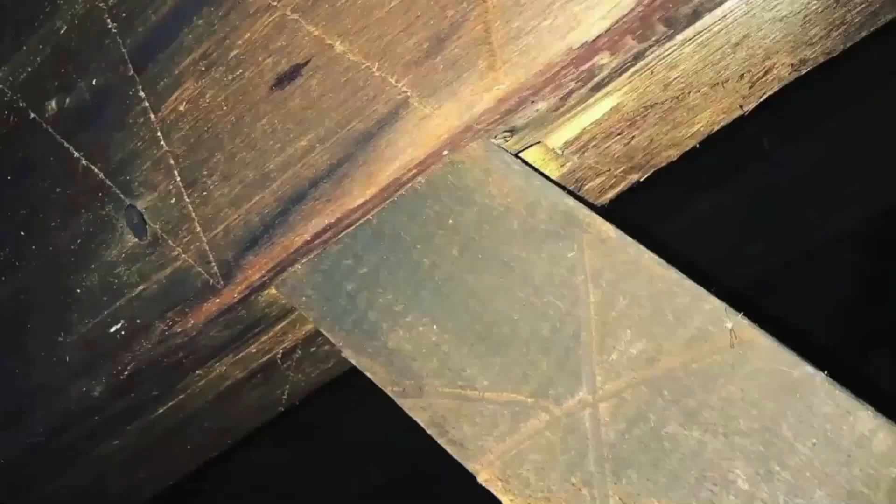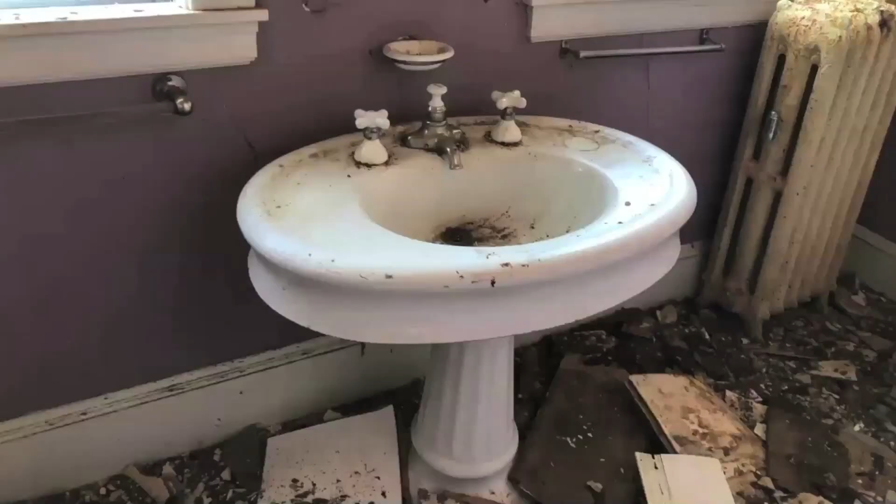Fixtures and appliances can be character-defining features in some instances. You know, this sink, the steam radiator, they can be character-defining. What does it say about the occupants? Why were they installed? Was this the new technology of the time? What does it tell us about the people that live there?

So what does that mean for us? It means when we're working on these projects, we have to find that compromise, that balancing act. And we also have to manage our expectations. And I think if you're a builder or an architect here, it's probably one of your biggest jobs when working with clients is managing expectations.

We have to accept that change needs to happen, but also understand that there are certain elements that have to be preserved to keep these buildings historic, so that we can look at it and see an 18th century Cape Cod style house, but that it's also comfortable and livable. As preservationists, we have to accept that there are new definitions of what comfortable living space is. And so, again, that's going to be part of the compromise.

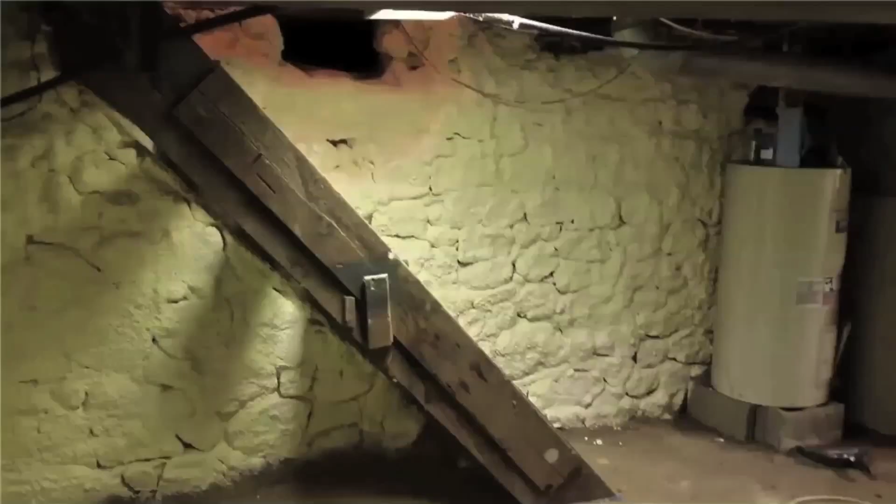We have to think about the materials that we use and how they will affect the historic materials. So what will this foam do to the porous materials underneath it? Is it reversible? And I think that's one of the main takeaways from today: we have to think of ourselves in this one period where there's people before us and there's people that will come after us. And what we do to these buildings, we have to hope that it can be reversible if need be.

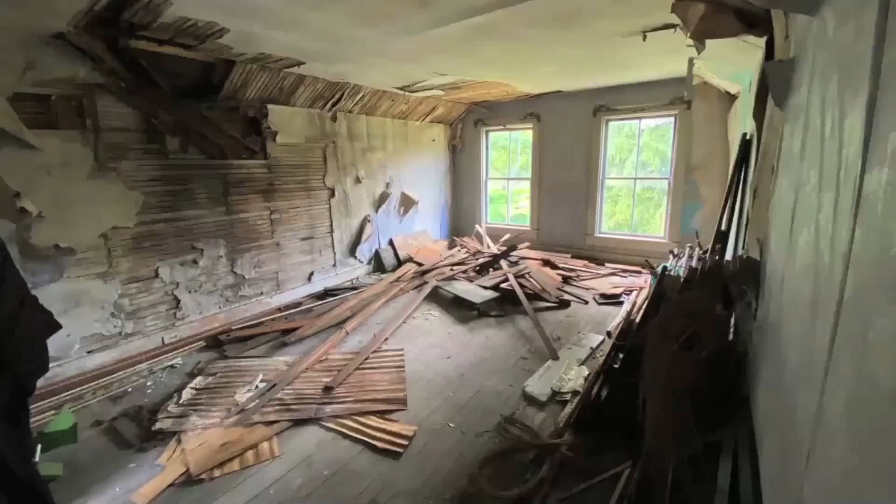We have to look at historic materials and new materials in terms of their serviceable life. How long will they last? What is their integrity now? So as a preservationist, yes, I want to save historic plaster, but I also have to accept that sometimes it's lost its historic integrity and it's not worth saving. And so the question becomes, what do we replace it with? Is it worth replacing it with new plaster? Or can we do blue board with a skim coat? Or can we just do it with drywall or some other type of interior finish?

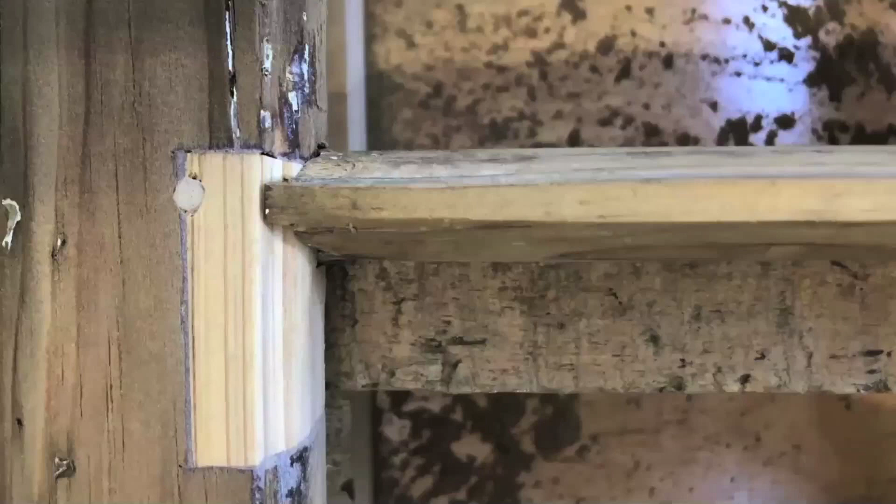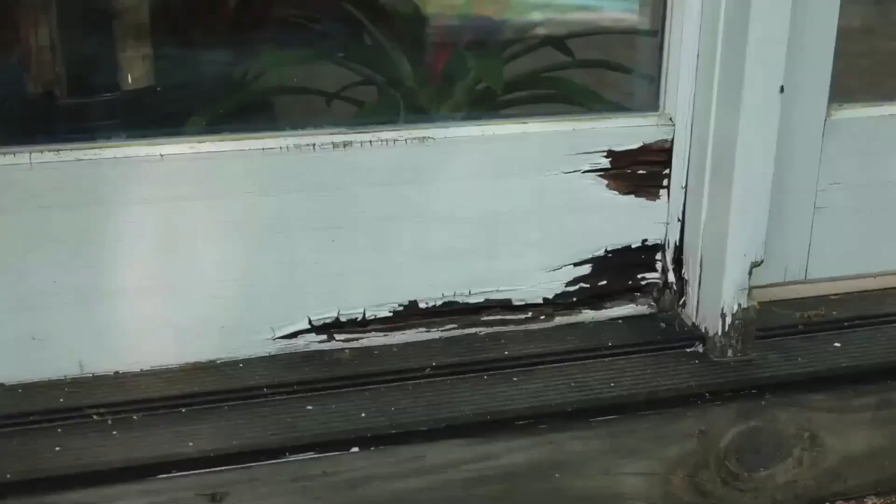Something that's near and dear to my heart is maintenance. We have to remember that buildings require maintenance. No matter what the vinyl or aluminum salesman says, buildings take ongoing care. We need to take care of them and maintain them. And that's not always a bad thing. Like these 1820s windows that I restored, they can last another 200 years if they're just well maintained with a new coat of paint. And I think that ultimately that's better for the environment if we keep things out of the landfill. And once we get on that replacement train, it's pretty hard to get off.

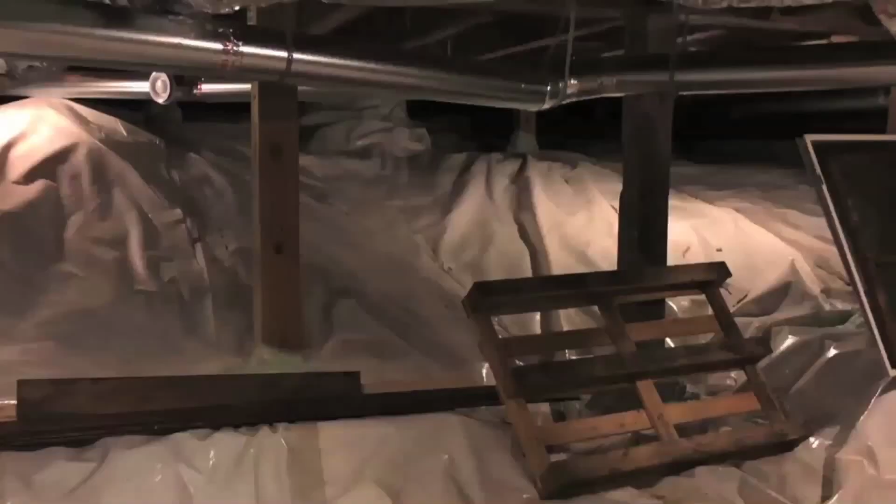So specifics, when we're thinking about insulation, again, we have to acknowledge that buildings need insulation. But so what do we actually use? Do we use an irreversible material with a high R value? Or can we use a reversible material like this cellulose with a slightly lower R value? Can we just manage the moisture and vapor and air barrier and then think about how else we're going to tackle a thermal barrier? Or maybe is it necessary?

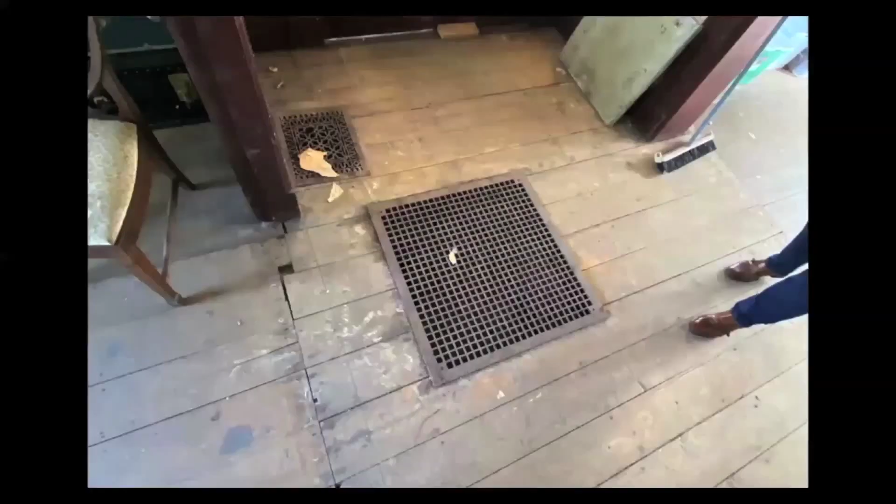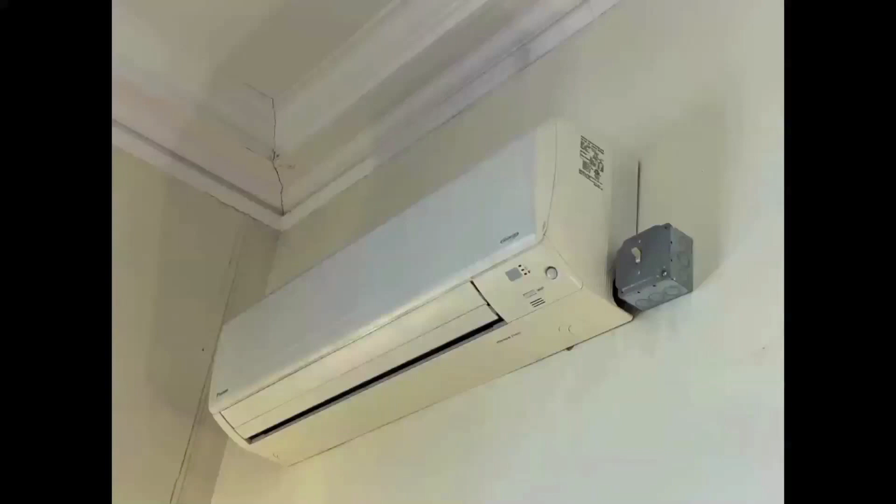Low-hanging fruit for me is replacing inefficient heating sources, like this gravity-fed system in Swanton. But then the question also becomes, what's the best option for a new efficient system? Like, does this heat pump detract from the crown molding and these high ceilings? Would a better option be a floor-mounted system? These are the questions that I think we want to ask. And I think that's kind of the biggest takeaway for me is that it needs to be a conversation, that it's not going to be a one-size-fits-all approach. It can't be.

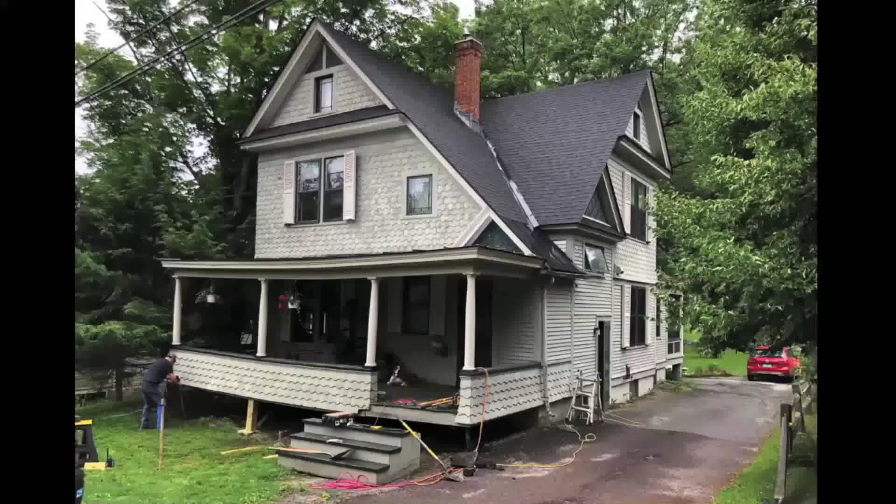So just to summarize, we have to remember that these buildings, not only are they homes, but they're cultural resources, like this workers' housing in Burlington. What does that tell us about that community? We have to think about the specific features of these buildings that are important and worth saving. And finally, we have to think about how we care for our buildings. Now, in the future, what will we be able to do? What will we be able to remove or replace?

And I hope that was a brief summary of what historic preservation is. But again, I'm looking forward to this conversation. It's something that's really important to me. So thank you.

Thank you. That was a really, really great introduction, Alex. Alex and I have been working on this building down in Pittsford. It's interesting because it's not in a historic district. It has a lot of meaning to its family, and it's a great example of how I think COVID has had one huge benefit: it has encouraged us all to slow down and understand the life and uniqueness of really every building, like every person. As we slow down, we can focus on being more inclusive rather than being exclusive in the traditional sense of a historic building. If it's historic, it's got to be nationally recognized.

So here is a historic building on the quiet edge of a very quiet town. And Alex is going to take us through the beginning of it. And we're looking at these steps of how do you make a plan for this building. This house actually has been in the same family almost since it was built. And they're not sure what to do with it. And so it's a very personal and private adventure that they're taking on as it switches generations. And it's going to ultimately be a personal decision for them of how they balance the building with the environment.

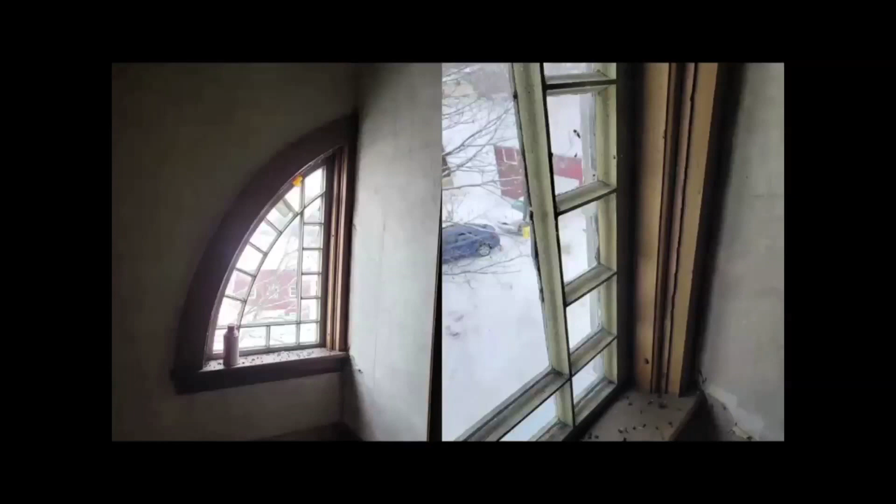Oh, so sorry, the windows. Here's the interior detail of those remaining historic windows that are not the stained glass. This is on the 3rd floor, and they've really maintained their integrity. It's going to be interesting to see how these last versus the vinyl replacements. Next slide, Sandy.

And this building is, again, right on the cusp on the exterior of losing its integrity because the siding has been covered. So in talks with the SHPO's office, the Division for Historic Preservation, they're really going to push for this building to be deemed historic, to be on the National Register, and then open to maybe some funding. They're going to want the siding either restored or replaced. Next slide, please.

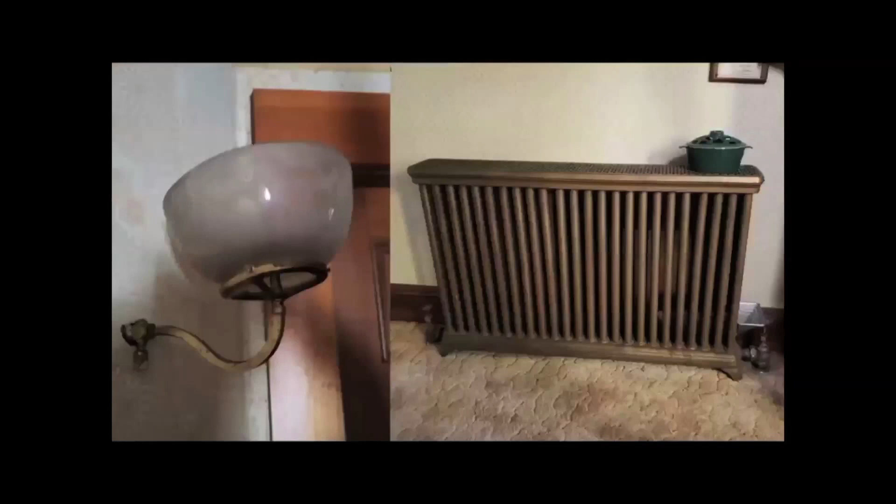And then again, we have some of these interior fixtures like the original gas lamps and the steam radiators. These are important. The fact that Pittsford, Vermont had gas is kind of impressive, and I think tells a lot about that community and a lot about this family that they had that hookup. The steam radiators are beautiful.

So, as we're moving forward, we're going to have to think about what we do with these features. Maybe they can be left and new heating units can be installed, so we still kind of can read that these fixtures were once there, but they're no longer serviceable. Again, it's going to be a conversation as we move forward. Next slide, please, Sandy.

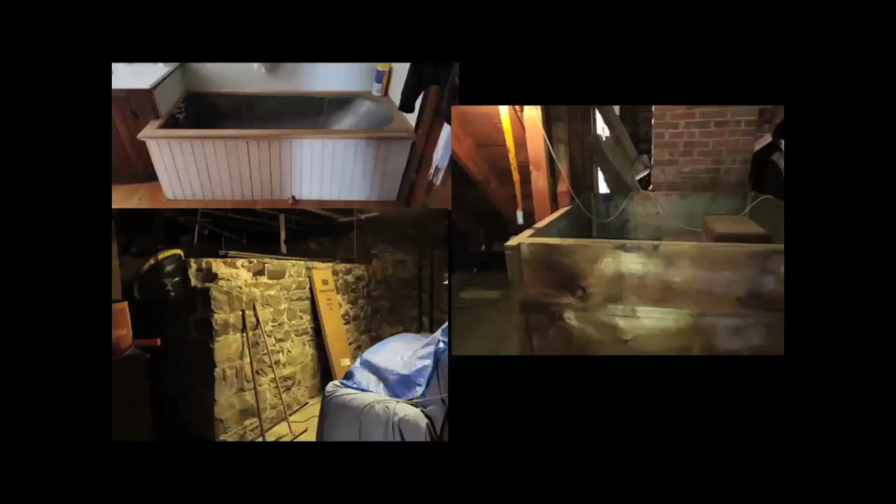And then we have features that are really interesting. The possibly original tin bathtub and the cisterns, one in the attic and one in the basement. These are very cool. But what do we do with them? Does it make sense? Again, we're thinking about that new level of comfort. A tin bathtub may not meet new standards for comfort.

And the cisterns, they're interesting and they kind of tell the story of the need of water and how it was moved around the building. But if they get in the way of insulation or other kind of things, we have to think about their use and how important they are. Next slide, please, Sandy.

So these are all questions that we're going to ask, and it's going to be an ongoing conversation between the architect, the builder, the homeowner, and the preservation consultant. Next slide, please, Sandy. Oh, thank you.

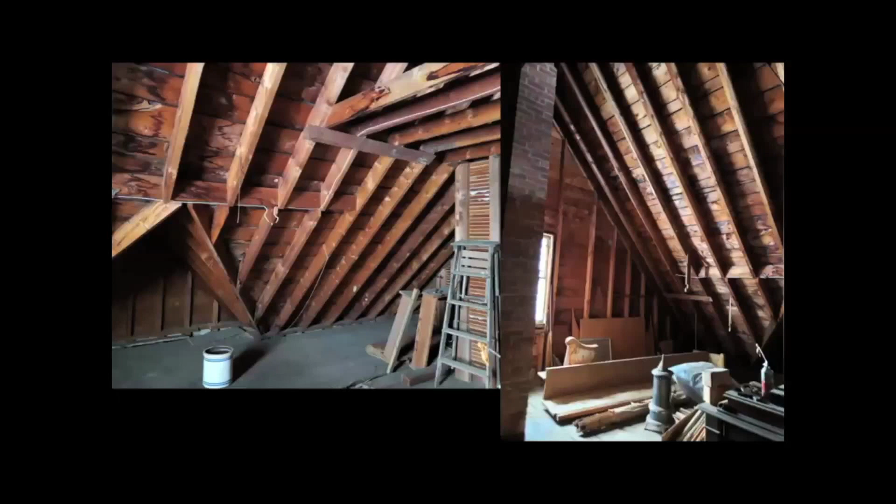Aside from energy retrofitting or use changing functionality of the building, it's super critical to look at structure. So that is really one of the first things I do when I look at a house. And it's interesting, if one brings in the energy rater first, often they are not trained to do that. So they may make suggestions that are not appropriate for the structure of the building.

But an architect will go in first and look at, and probably call in an engineer and assess what is the health of the structure, what is the type of the structure. This was probably balloon framed. Are our roof loads being carried down sufficiently? Has shear or horizontal thrust been taken care of? At the foundation level, what is the material? How is it holding up?

Sorry, Sandy, if I could just quickly interrupt and we can go back to that. Yep. Oh, next, yeah, we have to get to that.

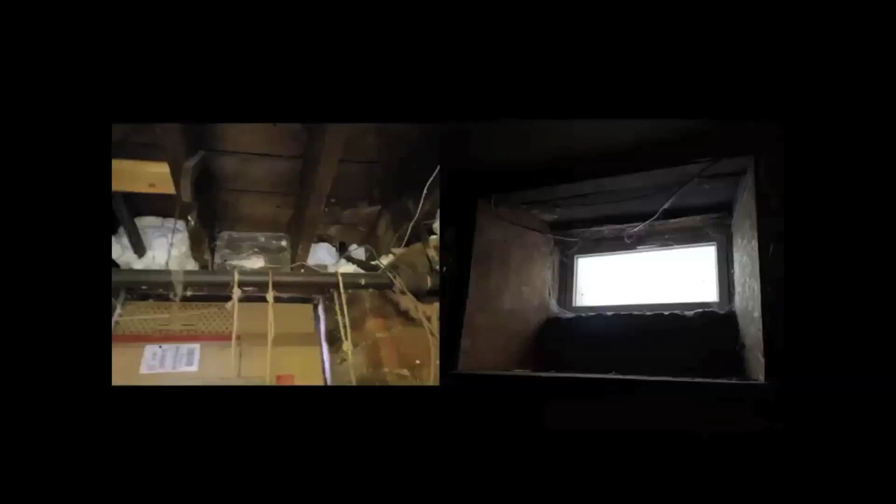They're also looking at how things move or fail over time, particularly with flashing. So it's important to know in this dormer, for instance, is it just a weather, a flashing and water issue, or is there something structural going on? It's also important to look at the envelope and to get a sense of what they've done over time. Is it a coherent strategy, or is it kind of piecemeal?

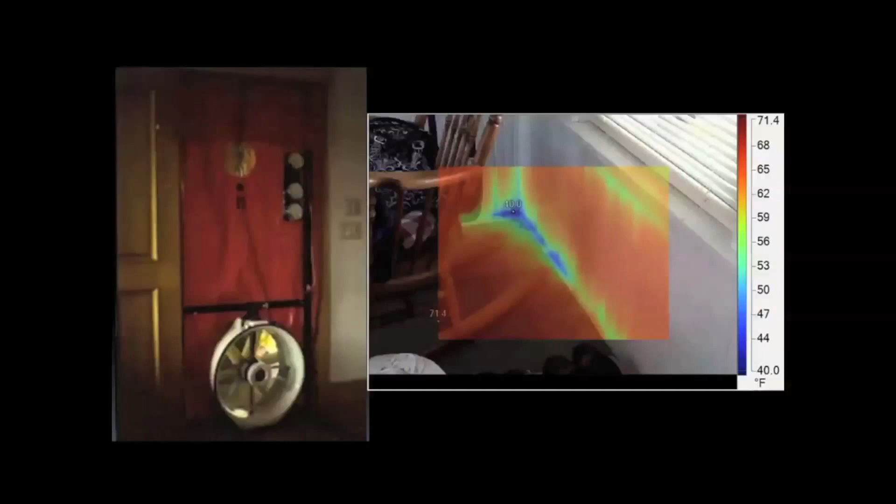And we also, with the envelope, really encourage people to do a blower door test and/or an infrared study. Both are super useful. These highlight the two major issues of an older house. One is air infiltration. And if that can be dealt with, Alex mentioned low-hanging fruit earlier. We'll get into this in more detail this morning, but that is definitely in the category of low-hanging fruit that can help the building function much more like a modern building very quickly.

And what's going on in the infrared? That's the question of heat loss. So thermal transmission through the wall. Can be related to air leakage, but it also can be related to simple R and U value, which we won't get into this class, but most people understand that R value is the resistance and U value is the inverse, and U value is used to figure out the assembly of wall. It just works better.

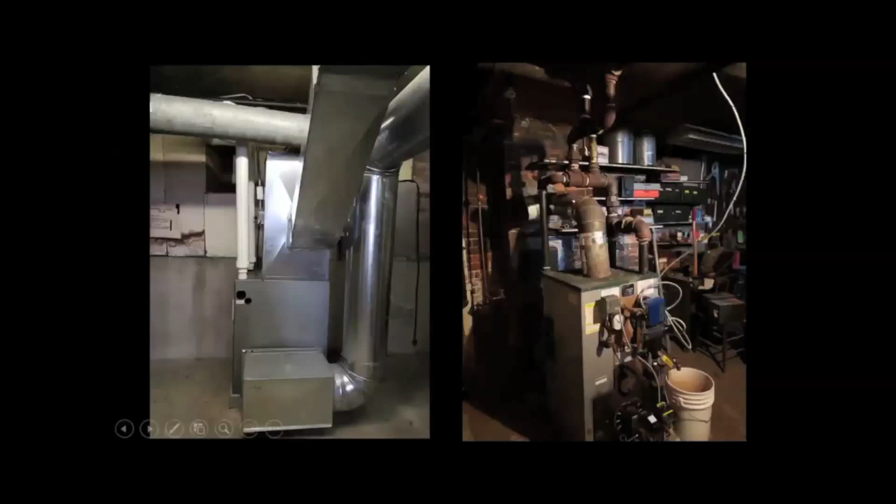We also go through the mechanical systems. This house was kind of fascinating because the front of the house is heated still with water, or may even be steam. And the back of the house is an air system. They had a fire in the back of the house, and so they converted to air. And the family was an older woman for many years. She just lived in the back of the house. So it was easier to insulate and to keep warm.

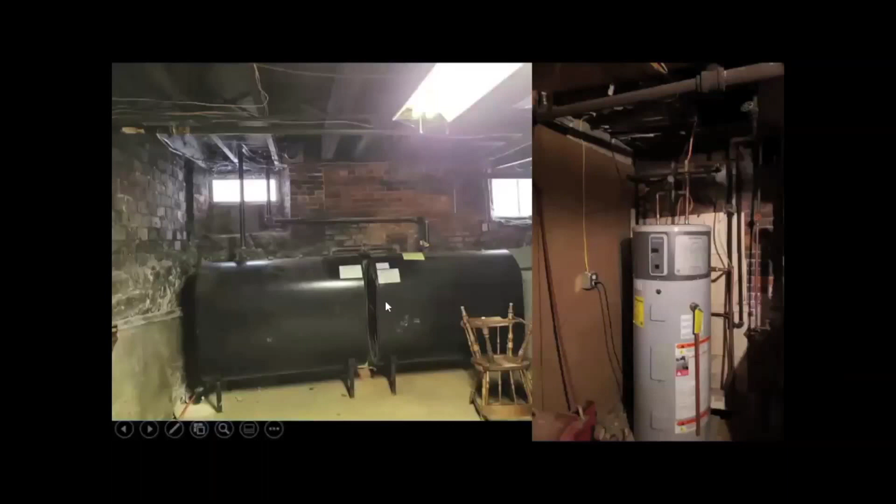Looking at peripheral mechanicals, it's very important to assess the plumbing and the electrical systems of a house. Aside from any of these other considerations, just understanding if they're dangerous.

There's not too many lead pipes in Vermont now, but old clogged up pipes and knob and tube wiring. Really, whatever happens, it's good to update.

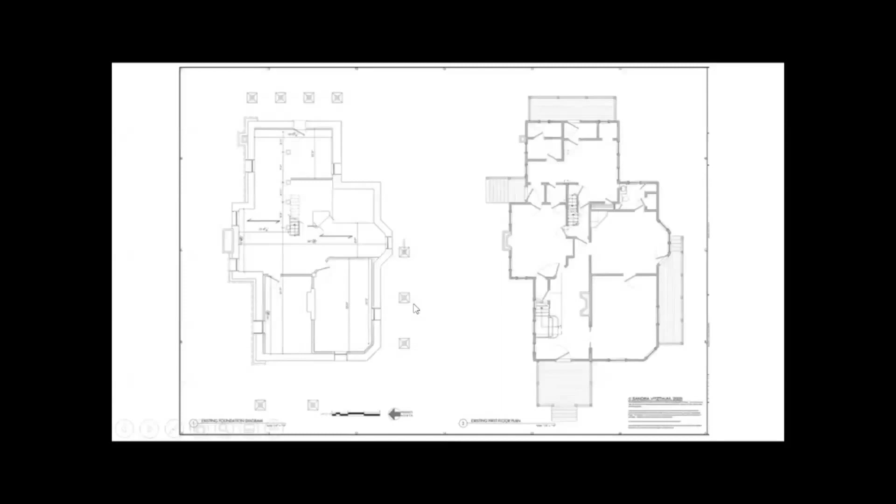We also measured the building, and this becomes very important with the energy analysis later on to be able to understand surface areas and volumes, so you can begin to quantify the air loss, air changes. We also will typically do a review of all relevant energy codes and building codes. And I guess this is a point here to say that today we're focusing mostly on residential, but small buildings are structurally very similar, small commercials very similar.

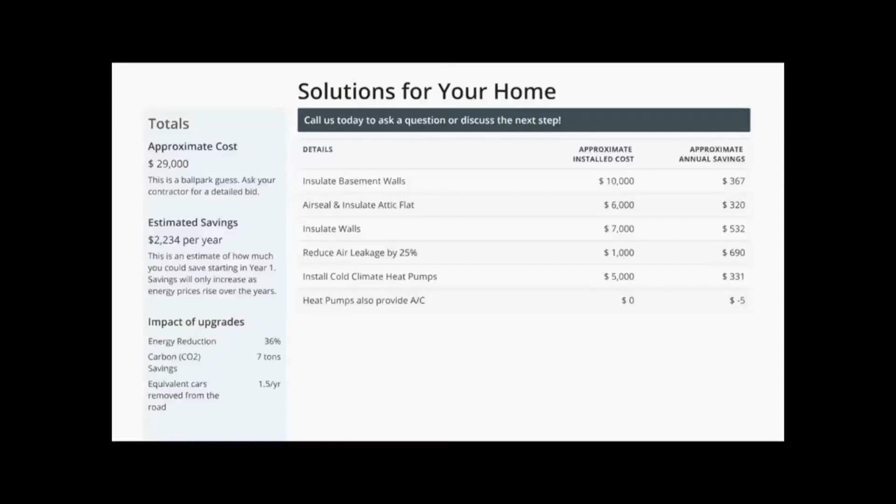And then the owners on their own had a heat energy audit. And so this is where we can really see where the path could diverge. If the homeowner is more focused on energy savings than anything else, they could simply follow these directions. But the typical energy audit that one gets is really kind of almost a cookie cutter approach. The technician is following a template, and they're kind of just fitting in pictures of the house and then fitting in the data that they get. They're making suggestions that may be completely wrong for this individual house.

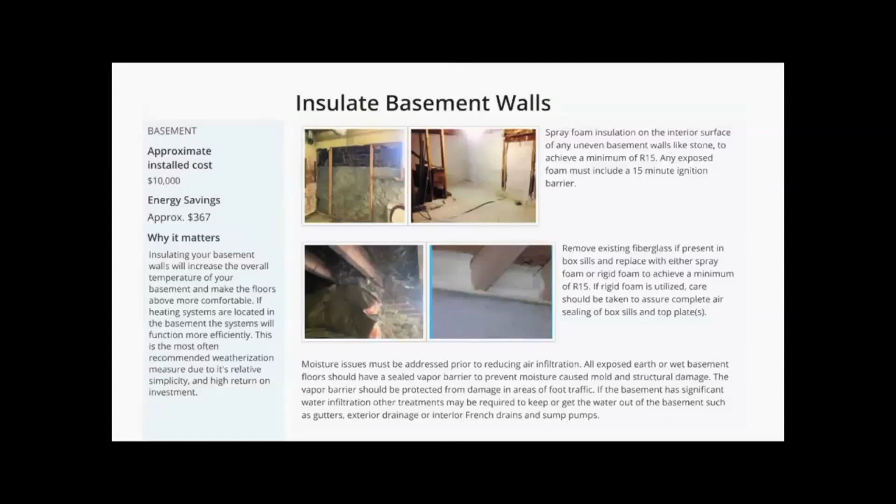You see a picture of totally foaming a wall, an old stone wall, foaming the rim joist. We'll be talking about all of these things. Kind of their approach to the attic, which would be using spray foam and then cellulose on top. It's interesting to look at the sidebar of the cost and the savings, and it's always useful to look at the payback. If it's a payback of 20 or 30 years, it's probably not as high a priority, and that should be considered too. What is the risk or destruction of historic resources for a limited payback?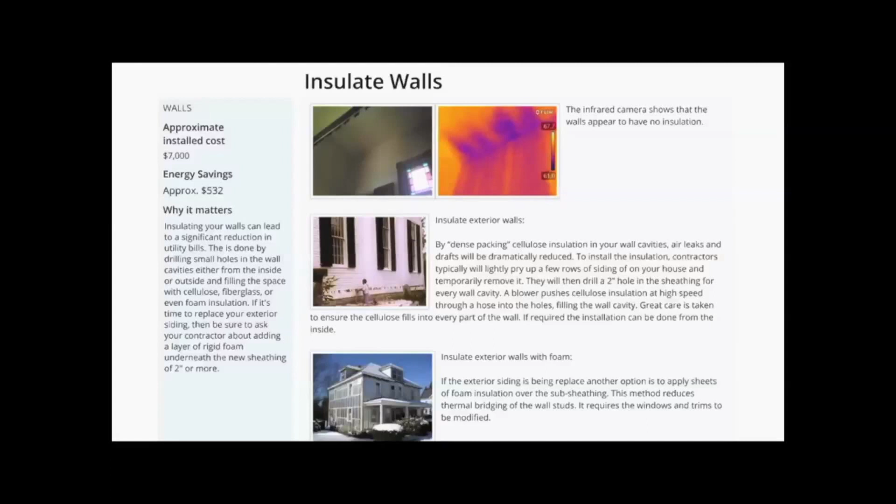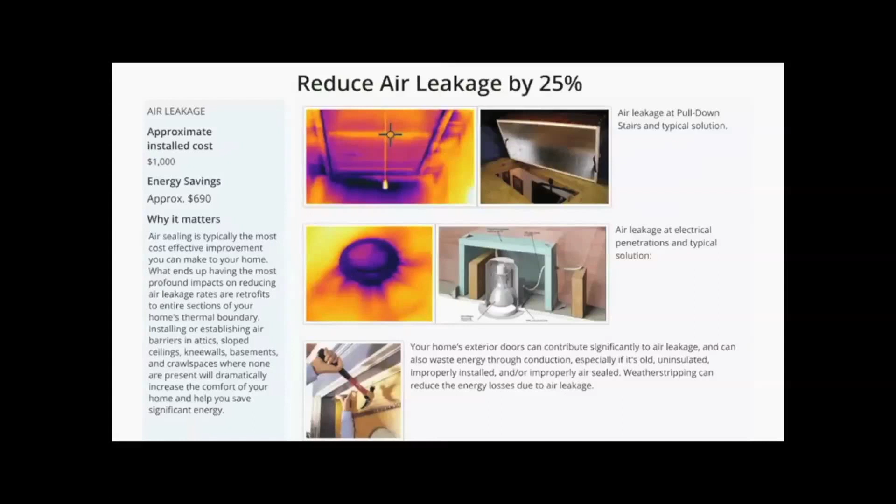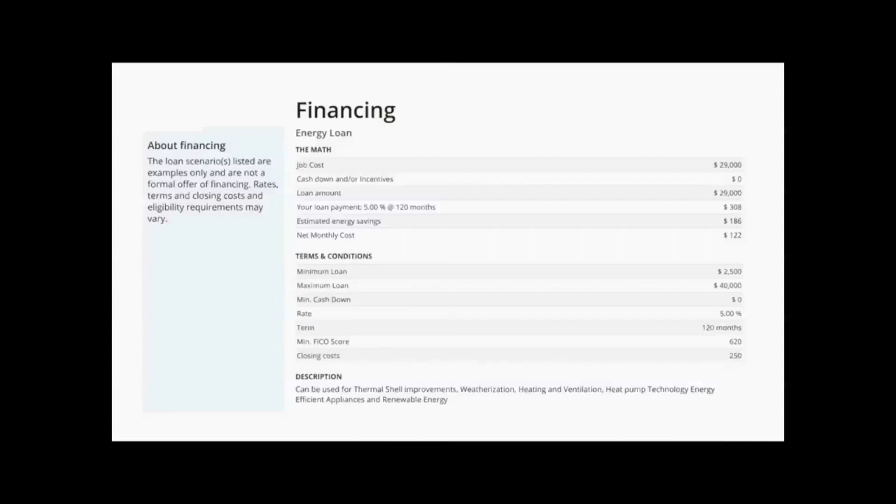Again, I'm on the same page with air leakage, but spray foaming may not be helpful. Look, we're talking about recessed lighting. I think most people know that that's not a great idea, or at least get the insulated cans, or the LED pucks. Anyways, what I'm trying to say is that it's one size fits all, and really the goal at the end is to sell the homeowner on this package of incentives, and actually not even a great interest rate to do the work. So we're talking about the difference between a one size fits all drive-in meal versus a really delicious slow cooked meal with local foods.

Sorry, Sandy, just to come in again, I think these energy audits can be really useful to give you a brief overview. They go through your home with a thermal imaging device, they do the blower door test, so it can really point to the trouble areas that your home or business may have. And then it gives you some options for how to tackle those issues. But I think really the next step after you identify those problem areas is to contact either a contractor or a builder or an architect to find a more unique, tailor-made solution to reducing your energy usage.

And then, think about that risk factor of, what's the payback period? What is the potential damage to historic materials? And, is it necessary? So I think they have their place, but I think you're absolutely right that the tailor-made approach is definitely a better way to go. I was really glad that the owners called us in to have that conversation. At least then they could make a more educated choice.

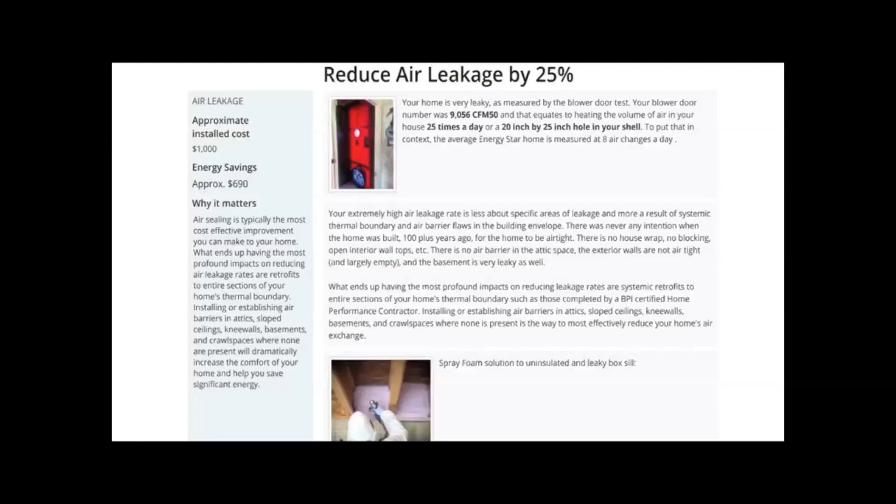But ultimately it's the builder in this state that has to file the certificate. Using the resources of Efficiency Vermont, they would make inputs on the energy savings: the air infiltration, the thermal value, and the mechanical systems. Those are the major things the builder is signing the certificate for, saying the building conforms to the code. Thank you.

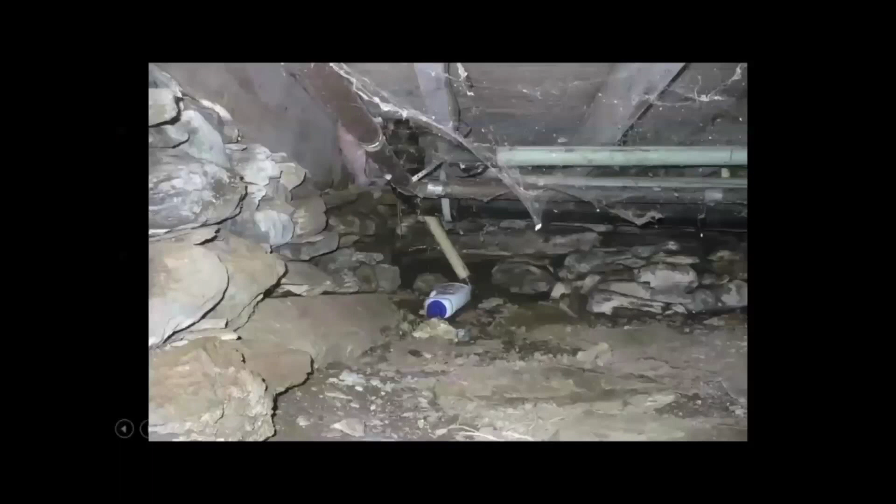Now we're going to look more at general buildings and a variety of common problems we see, starting from the bottom up, and look at the depth of considerations for making a decision, like should I use closed cell foam here? What are the other options? What are the trade-offs? So let's jump right in, starting at the bottom of the building.

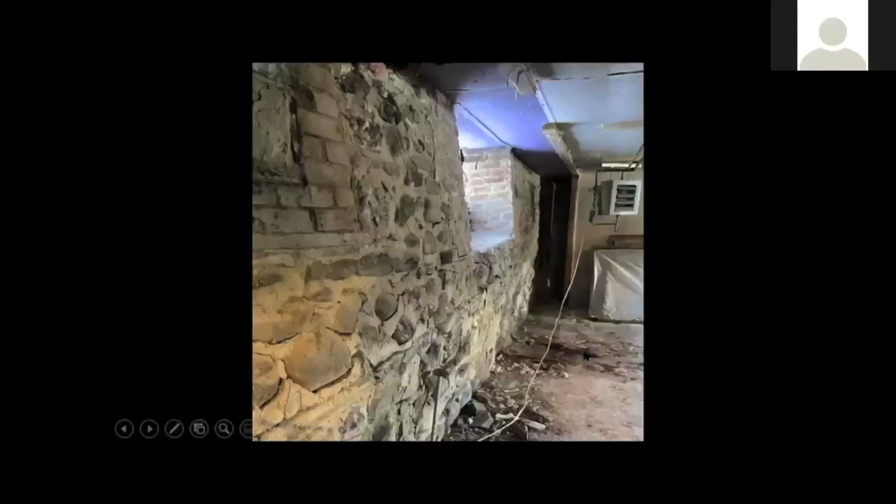Bob, so we're looking at typical foundation issues. Here's a crawl space that is dry laid stone, and it's been leaking so badly that soil from the outdoors has filtered through to the indoors. There's probably a whole lot of dry rot in here. You can see they've insulated the underside of the floor for comfort. There are a lot of penetrations. This leakage could be simply due to whatever piping that is. Who knows?

Yeah, let me jump in here. My focus is that before attempting energy retrofits, it's good to understand and review the structural systems, so you understand the impacts you might be making on them when you start making energy and moisture changes. In some cases, systems may be on the edge, or already in trouble, and you might make them worse.

This is a case of a stone foundation wall that has been bowing in, with about a 4 or 5 inch bow and a big crack right along that face. So to go in and insulate this now, reducing the building's heat loss that keeps the soil outside from building up frost, would probably not be a good thing without making some changes.

Right. So there are 3 major considerations we're going to look at throughout the day in all of these building systems: moisture, air, and thermal value.

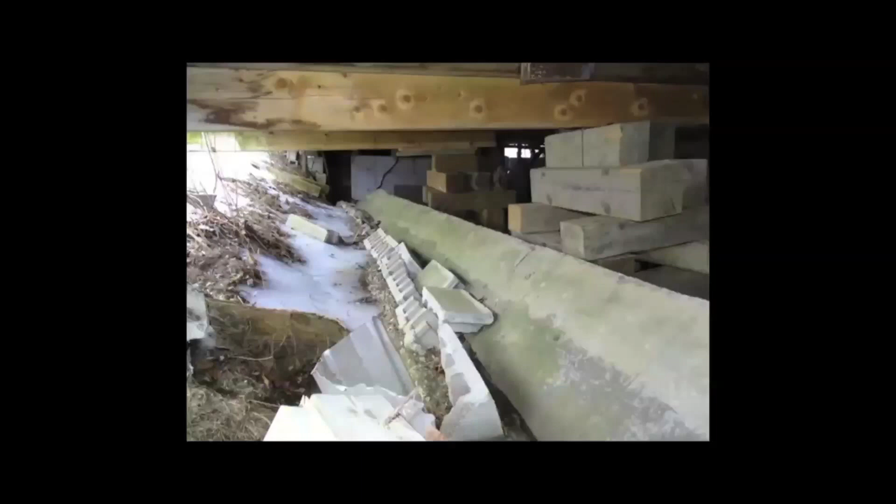When I look at buildings, we have done retrofit of stone walls. You can find cases where you can make a stone wall work. You can look at the stresses and figure out that there is no tensile stress, and you can figure out how to replace in kind with stone. There are some cases where it's pretty obvious that you just need to do a complete replacement, and this happens to have been a concrete wall. And what you're seeing there is the entire wall has caved in and knocked over.

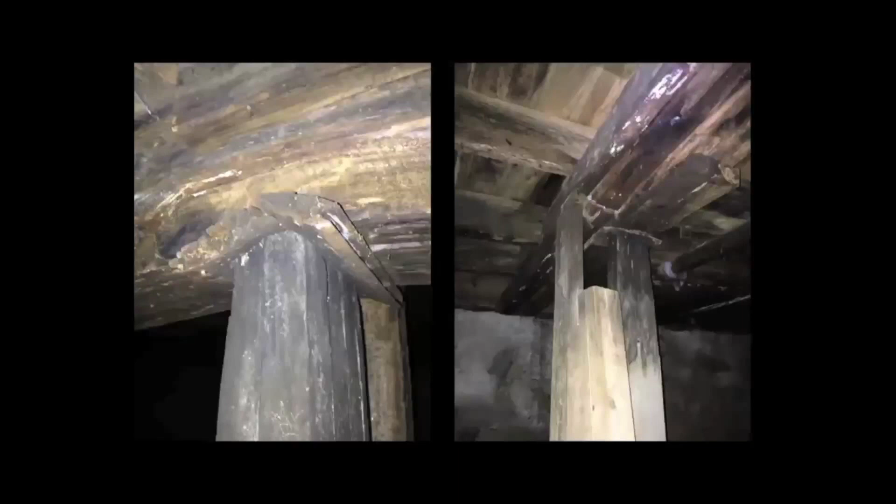Yeah, Cindy, there are a couple questions here that maybe I can jump in and try to respond to. Jay says, should we let stone walls in the basement be uninsulated so they keep frost from forming, and then insulate the floor above with rock wool? I think the answer is maybe.

There are a lot of different approaches to this. One of the things we have done is just completely avoid addressing issues in the basement. I think if you insulate at the floor, you've got to make sure that there is still some heat in the basement to trickle heat out into the exterior.

It is not to say that you can't find a way to insulate the entire wall in a basement. You could take a stone wall. You've really got to look at the wall and understand what are the issues that are causing the problem or the potential problem. And so one way to deal with that is to excavate on the outside and backfill with a better material. Backfilling with crushed stone increases the ability for the soil to drain, obviously, and crushed stone also reduces the lateral pressure on a wall.

So it's conceivable. It is not always feasible on every building, but if you've got a wall that's thick enough and you can repair the mortar, or maybe it's a loose laid stone, if you can make that more stable by reducing the outside pressure on it, then you could insulate the entire wall.

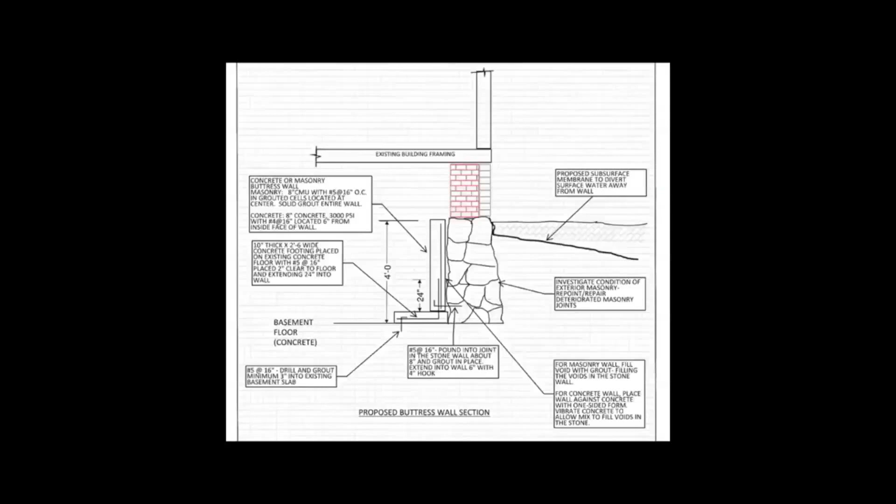This is a similar case with another wall project that Paul Brun got me involved with several years ago. This is similar to what we just saw, but we're talking about an 8-foot wall rather than a 4-foot wall. So you can see it ends up being a little bit more concrete, a little bit more work. And there's also no way to get access to the exterior to try to get drainage. So we snuck a little drain pipe between the existing stone wall and the concrete wall. And there's also traffic loads on the outside, so this ends up being a beefier concrete wall to help resist that.

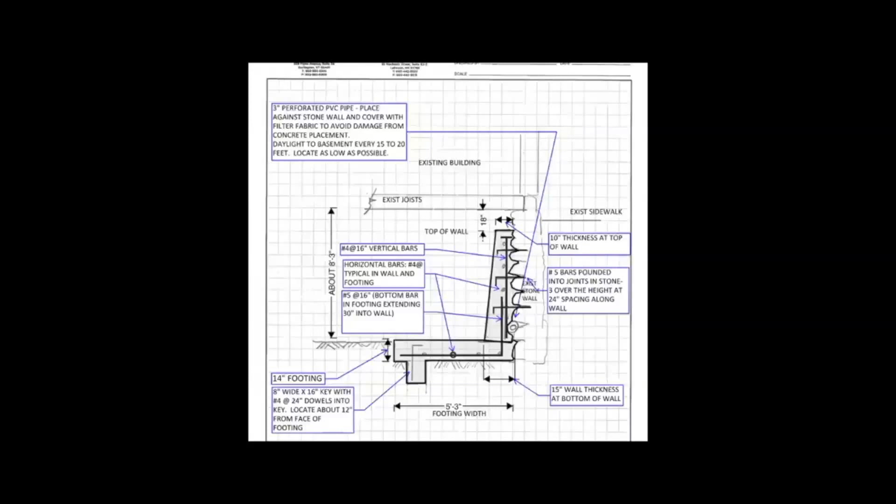Bob, there's a question. Is that a continuous wall or a pilaster? That's a continuous wall. Okay. And Ann is asking, can you talk about examining the exterior of the stone wall foundation without destabilizing the foundation with removal of the soil up against the stone foundation? Yeah, typically if you're going to look at the exterior wall, you're going to try to do that in sections.

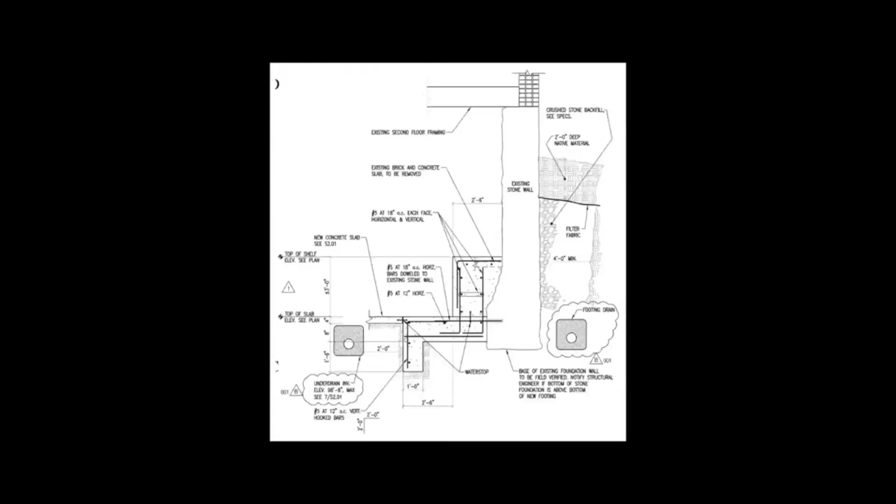You can cause some problems if you start pulling stones out. But usually, if you do one side of the building and not the other, you shouldn't run into too many problems there. It sounds like somebody's had an issue with destabilizing walls during examination and construction.

So this is an example of when you come to the conclusion that you're going to replace a wall. What we've done in many cases is taken an old stone wall that has failed and reused, say, a granite facing and put that back into the concrete wall. So you've got a modern concrete wall, and you continue to use the granite. And really, we should have the exterior grade up covering the bottom of the granite.

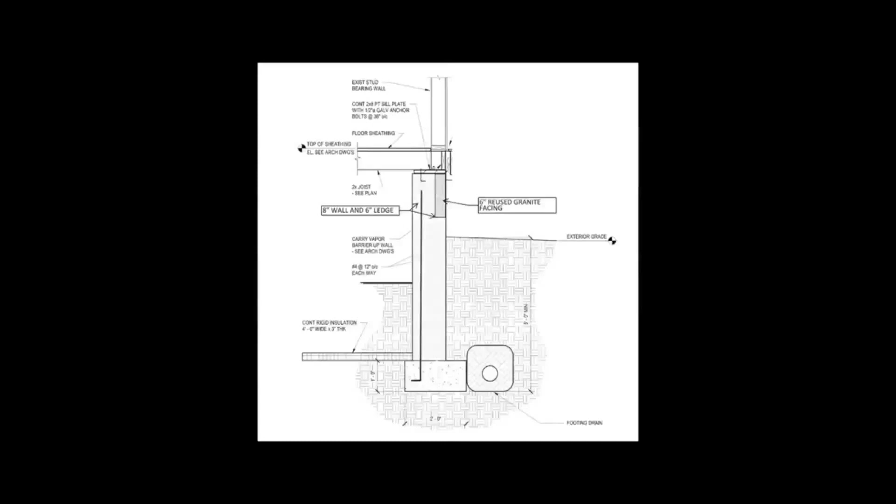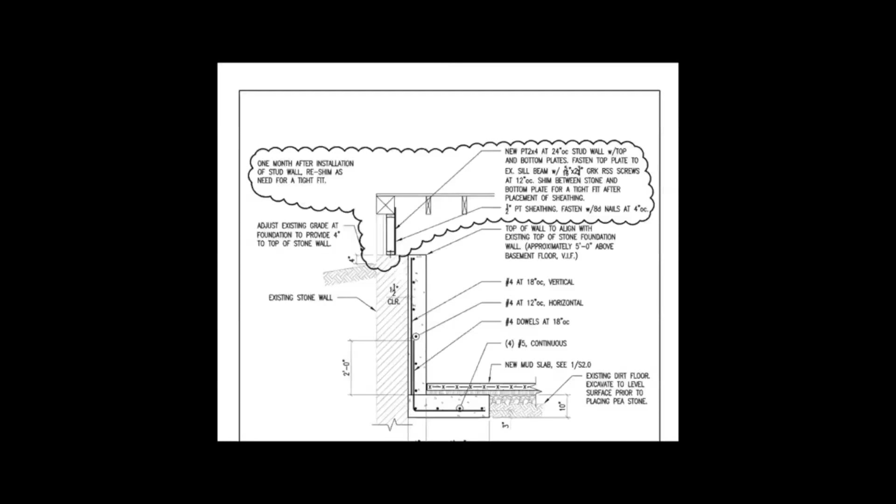So we've got the concrete wall on the interior, and in this case, there's really just a 4-inch wide by 2-foot deep piece of granite supporting the sill, and the entire granite system and the sill was twisting. So we ended up going back in and putting in a pressure treated wall to get continuous pressure from all the load coming from above to transfer straight down to the foundation. So there are a lot of different conditions that we run into, and every one is different.

I was going to talk about some of my favorite ways of dealing with the issue. Jay White brought up, can we try to protect the integrity of the stone wall? It's kind of an historic resource as well. So I approached, if the wall is in good shape, it can continue to be the primary support for the building. If you have dry soils outside, as Bob said, you can dig down, but if it's clay soil, my experience is that it's really better not to disturb that soil.

When you dig a trench on the outside of a stone wall to fill with crushed stone, if it's clay, it's like a bathtub. It actually draws water towards it and can make the problem worse inside. What I've done is insulate the wall basically from grade above, and then put the skirt out 4 feet of 2 inches thick polystyrene, and that works very well because then the envelope, if you will, is just kind of continued away from the building, so you have this protected area below that apron so that the frost doesn't begin to push the wall.

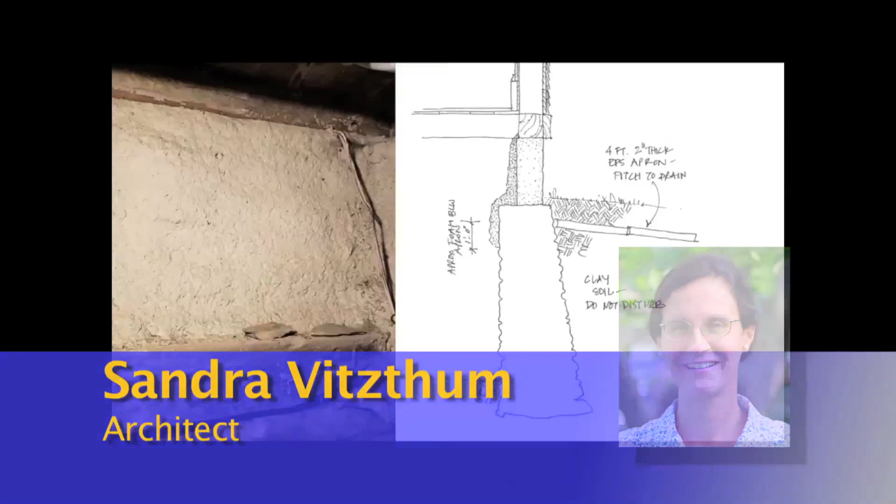The other thing that's important to remember is that masonry structures really depend on breathing out on every surface. That stone assembly is drawing up moisture, wicking it up, just because of the pulling action of dry air. It's pulling moisture through the rocks, up through the granite sill blocks that you see there, up into the timber frame.

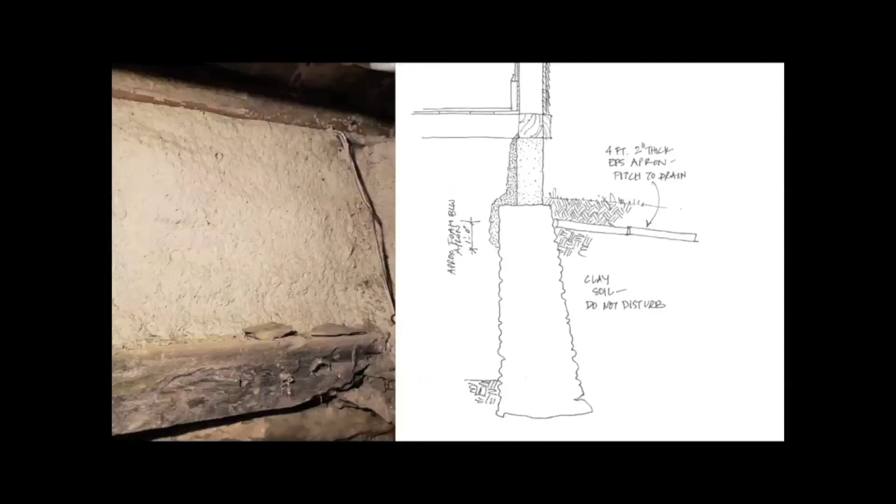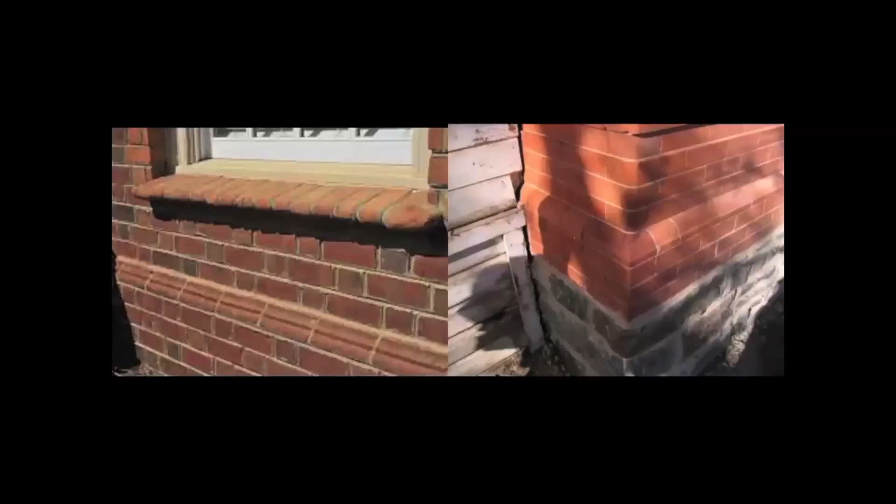Oops, see, it's coming up this way. Unlike a masonry structure that continues to be masonry up through the building, they have a water table so they can dry vertically. And that's what a water table is all about, keeping damp out of a building. And it does a tremendous job of breathing up vertically, partly because the sun is hitting it. But to return to this picture, once you start to seal anything on the inside, it puts a lot more pressure on the upward drying surface, which is the sill beam.

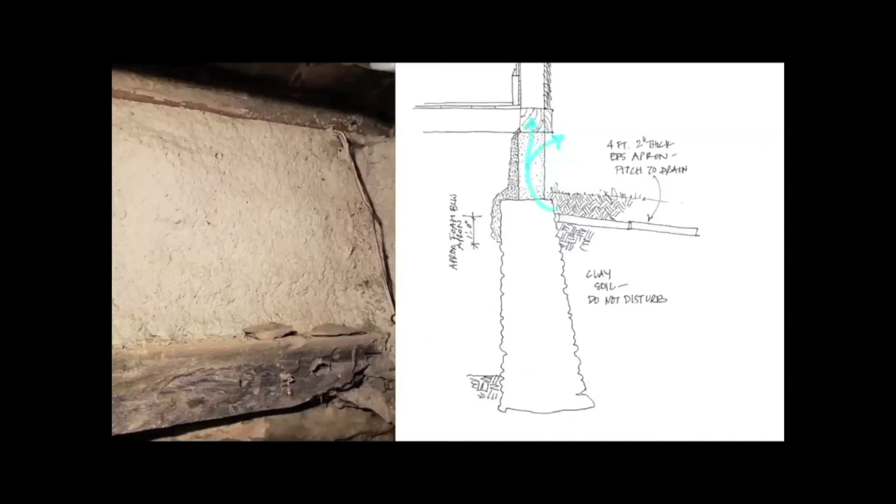Sandy, I just have a quick question. Would slowly jacking the building up and adding something like sill seal between that granite and the sill plate stop that? I think it would stop that kind of diffusion of moisture up into the sill, right? Wait, that is beyond anything we've ever considered. Jacking the building in order to get sill seal there. Bob, it seems like that would be a great idea, but that's a lot of work. I guess if the building's worth it, right? And the budget allows. Yeah.

This is Rick Kirshner. I think all of this is getting to the first thing. The first priority with historic buildings is getting the water away from the outside. And that's what we're all saying here. Before you even start any type of insulation inside, if you don't have gutters on, get gutters, and don't dump the gutters right at the base of the building, but get it away from the outside.

Absolutely. Which happens to be the next part of this, which is that a traditional building, when these buildings were created, often they had decent slopes away from the building, but especially in an urban situation, grade tends to grow up over time. I live in downtown Montpelier, and the grade is 6 feet higher now than it was when my house was built. And that can easily create a situation where groundwater is running towards the house. And as Richard was just pointing out, the eave line dripping can be a major issue. And so dealing with water at the surface level is really critical.

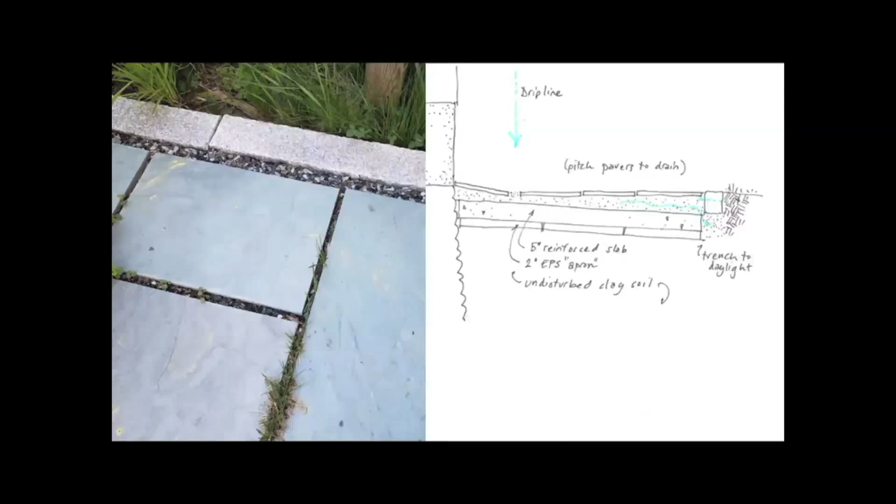Inside, either as a belt and suspenders approach if other actions have been taken, or it may be a primary action. One thing I've tried to do is to put a bed of stone underneath a new slab. So it might even mean taking out an old slab or excavating down further, and putting in flat perforated pipes that would lead to a sump pump. So this is another way to deal with it.

Someone was asking earlier about mold, and so part of the problem, you can remediate after the source of moisture is dealt with and the moisture levels reduced. But dry rot will continue even after the building's dried out.

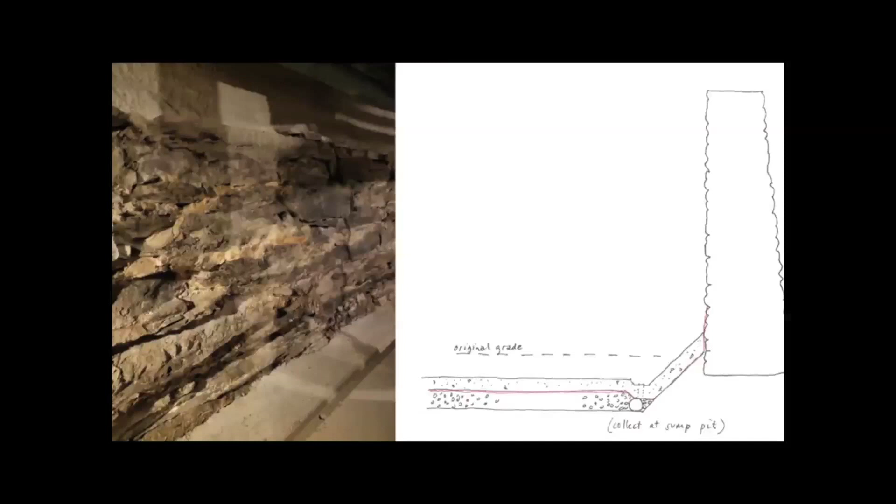And here, I'm just going to finish these and then we can have this discussion. So, I mean, my experience is, Bob, I've been very politely quiet.

You could speak up, but it seems that you've got to deal with the structural. I mean, the whole building is at risk if you don't deal with rot, and you can treat it with borates. My experience is it's better just to start sistering on and deal with the issue before any new wiring and ducting and plumbing is added to the building. But the dry rot is a really serious problem.

Yeah, let me add my 2 cents on moisture and rot. Obviously one of the things you need to be careful about as you do an energy retrofit, if you're trying to cut down on air movement through your building, if you've got a moisture problem in the basement, you're going to make your moisture problem worse. So Jeff is absolutely right. You need to deal with a vapor barrier in the basement, and also through the exterior walls, the basement floor and the walls.

The rot in wood. Basically rot is a fungus which requires food, oxygen, and water. The food is the wood. If you have your moisture content at the right spot, then you're going to start to get the deterioration of the wood. And so if you drop the moisture content of the air down far enough, the rot will stop. It won't grow anymore. You obviously still have the dry rot that's left over, but you can halt the process of rot by removing the moisture content.

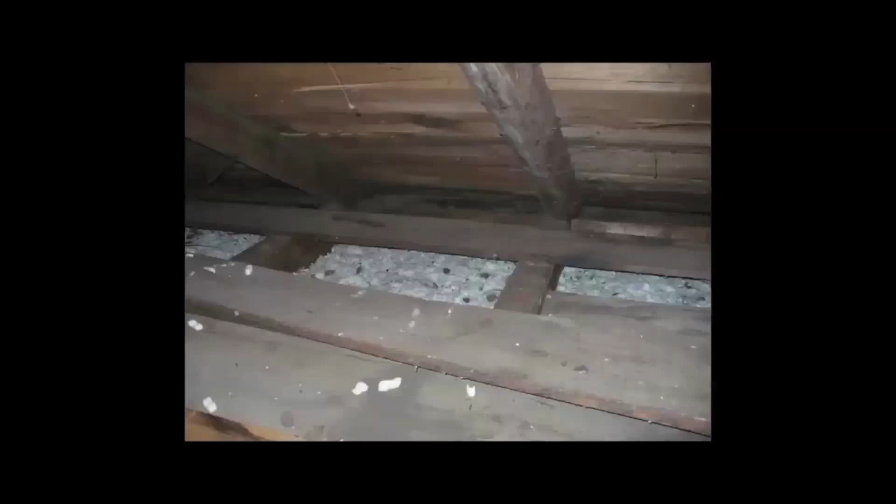I'll just end that with, I think we're all looking at a cautionary tale here, and I think that Rick is right. The first thing we have to do is make sure we are drying the building out as much as we possibly can. Yeah, I think I would add that with all these cases, they're all a little different, and you need to look at them holistically.

And it's all these different things. And so I agree with Jay's closing comment. I think insulating stone foundations is dangerous, but it's not impossible if you think through all the factors that go into it and understand what you've got for soil conditions and water conditions and air movement conditions.

So, other end of the building, another place you tend to find structural calamities quietly hiding away is the attic. So, Bob. Yeah, I guess the biggest thing about the attics and the roof structure is that whenever you add insulation to a building that's in use, you're potentially reducing the amount of heat loss, obviously, and therefore you're reducing the amount of snow melt, and you end up increasing your snow load on your roof.

So you do need to be cognizant of what you're doing when you're adding insulation to an attic. You need to be careful about overloading your roof system. So the building code doesn't specifically come out and say it unless you cross a threshold through an R30. When you cross that threshold from below an R30 to above an R30, technically you do have a change in roof loading conditions that requires you to look at something.

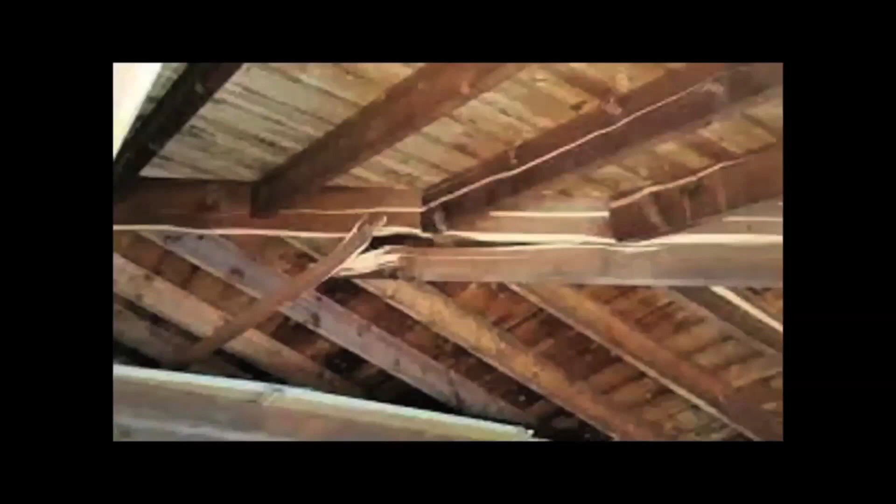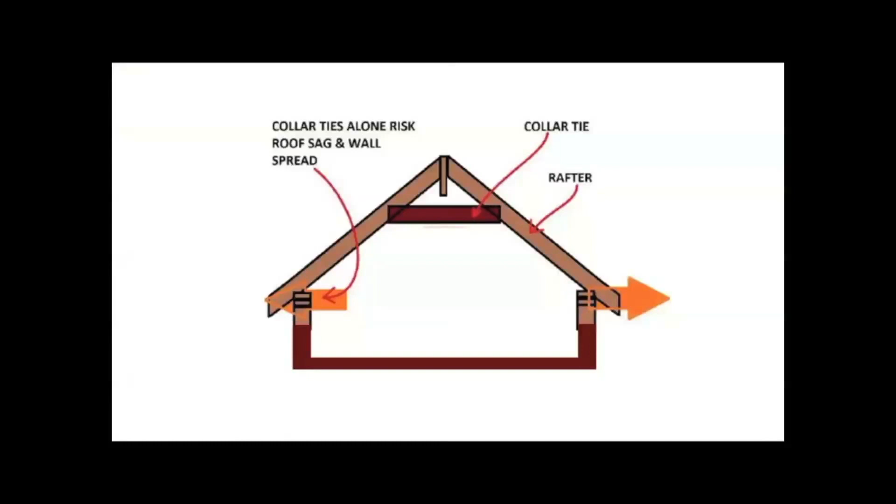Okay, it looks like, yeah, hips and valleys are typically the weak spots in a building, especially residential buildings. This is something that we see in a lot of residential buildings too, where the collar ties are high and you have a knee wall that doesn't allow you to tie the floor across at the bottom of the rafters. So you get a lot of spreading and bowing and sagging of the roof, and adding insulation to that will make that system worse.

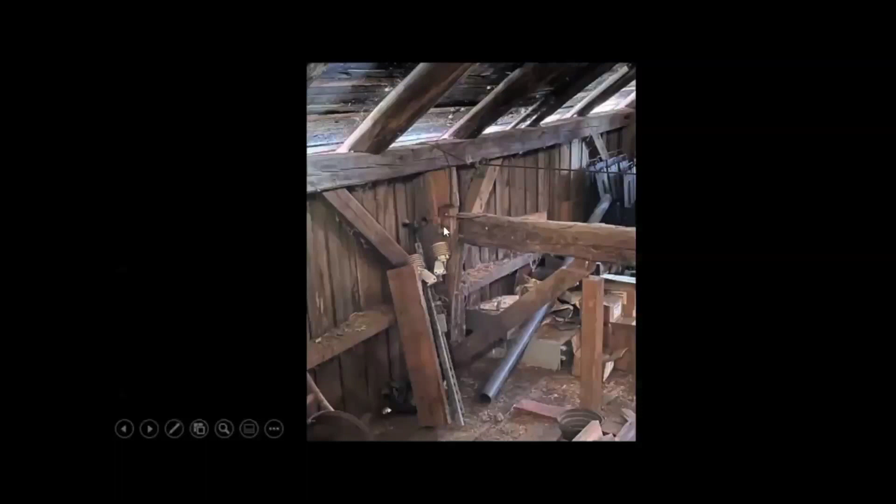This happens to be a barn, but you'll see a little bit different but similar type of trusses in town halls and churches and those types of buildings where the truss systems are losing their integrity at the exterior, and the roof is blowing out, trying to spread and failing the mortise and tenon joint. In this case, they've added cable ties to hold the building back in.

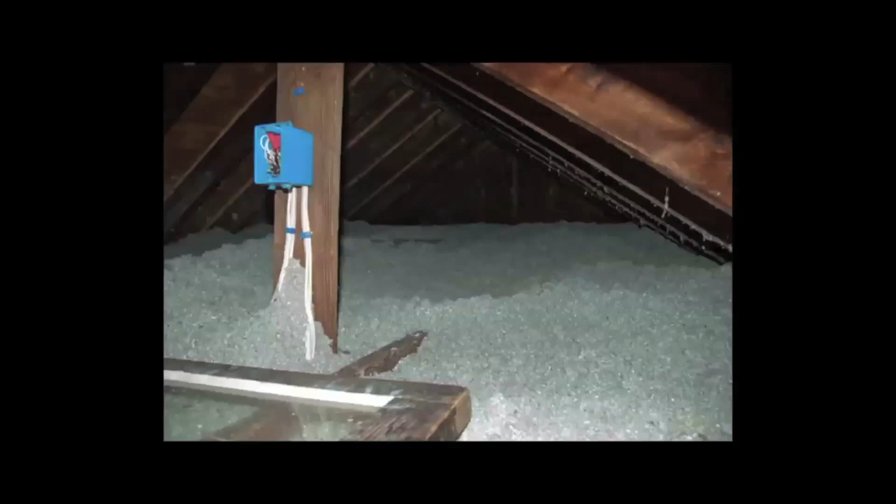So if we're trying to think about the two basic ways of insulating a roof, one would be, and again, because of the payback, I can't think of a case in Vermont where there's a decision to not insulate the roof or ceiling at all.

Maybe at Shelburne Museum there may be some examples, but I think that this is a case where people accept that cultural changes have been so significant over time. We heat our spaces more, we wear less clothing, we create more moisture with less ventilation for it to get out of the building. So the thermal value is critical to not have a huge amount of air movement through the house, as well as just to keep the heat loss down.

So the attic floor is one scenario. Many of these roofs breathe out through the roof structure. Quite often you see board sheathing, some kind of wood shingle underneath, and then often gaps, like ventilated roofs, before other layers of asphalt. On the other hand, sometimes the shingles were removed and it's already not breathing out, so it becomes important for it to be able to breathe inwards. But as long as these are kept ventilated, one side or the other, there's no need to insulate the rafters themselves, which is good because that helps reduce the load on the roof.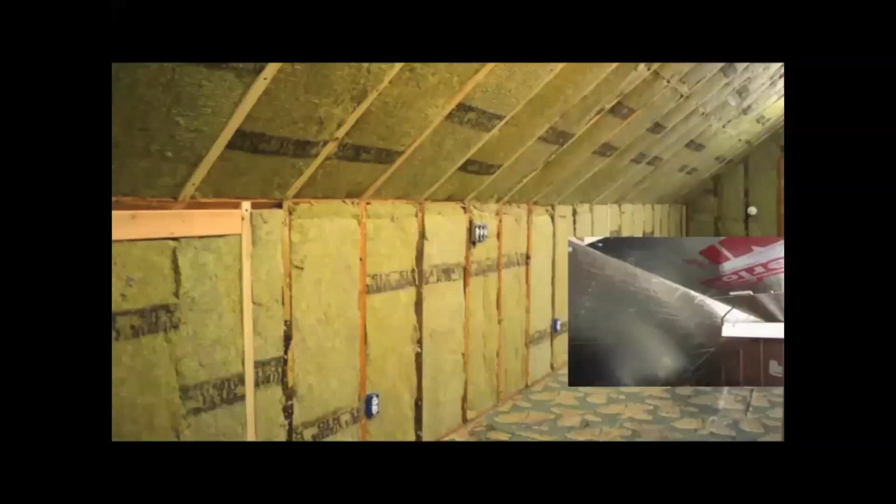So there's two pictures here together. The alternative would be to usually reinforce the rafters and then install some kind of batt or foam in the bays, with or without a vapor barrier. Often, if the building can breathe outwards through the roof materials, then you could actually put a layer of continuous insulation in. Thermax is a common one, so that the vapor barrier is all sealed in, continuous, and it's on the winter warm side.

Actually it's reversible if you use batts and Thermax. It makes a nice assembly that lets people have ventilation and heating ducts in the space up there. It lets the space be converted to use. But there's going to be pluses and minuses with either approach.

I want to go right into walls. Foundations are one set of questions, roofs are another set of questions, again with these same variables of air, moisture, and thermal resistance. Walls are really important for the defining character of the building. From the outside, they define the object, and from the inside, they define the space. So they often have relatively heavy importance in preservation. They also, interestingly enough, contribute less to heat loss for the whole building than the roof, partly because heat rises. So it's not quite as urgent to add thermal resistance in the walls.

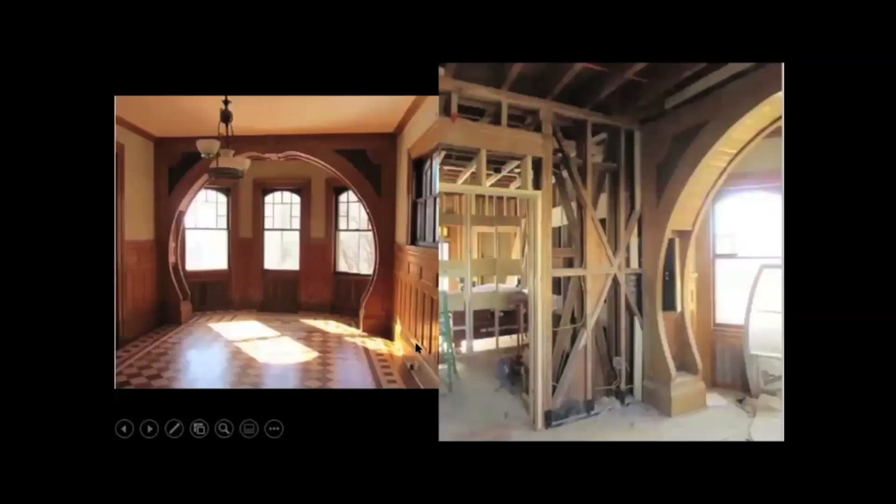And another approach is to strip the inside. This pair of photographs was shared by John Alden, and it really is just sad to strip off and probably not be able to put this back. It's possible that they were going to put it back, but often what happens is pieces get lost and it never returns to its original appearance.

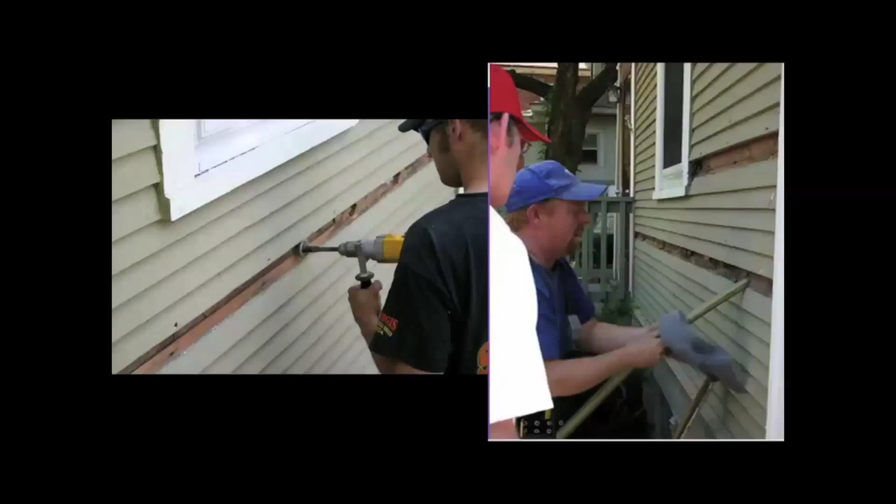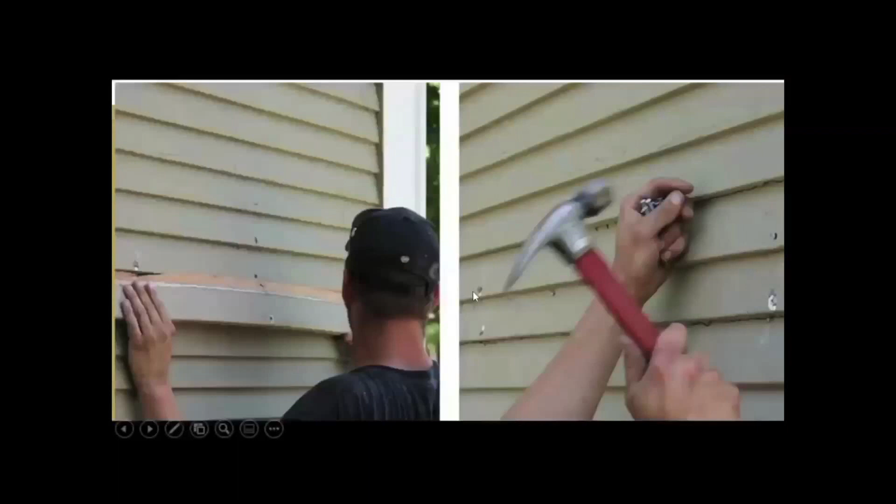So one solution, and you would want to be very careful of knowing if the building is a balloon frame before you would think about doing this, and if it is, to think it through, is to insulate just in the bays by going through the outside of the wall. As you can see, there's some damage, but it is relatively minimal, replacing the siding after the holes have been drilled. It should be done in connection with infrared to make sure all the voids are filled. I wanted to say a word about masonry buildings and some wood buildings. For instance, I live in a house that is solid wood.

There are plates of wood stacked up vertically, and the walls have to breathe from both sides. In masonry structures often also. If that is the case, it is probably best to look for insulative value elsewhere.

And if one needs to go through the process of exemption from energy codes, talking about its historic significance, these buildings are now so rare and so local in their manufacture, how they were built with local stone quarries, and even if they're not in a historic district, I would think they'd be able to make a case that they're significant structures. Oh, this is a picture of my own house.

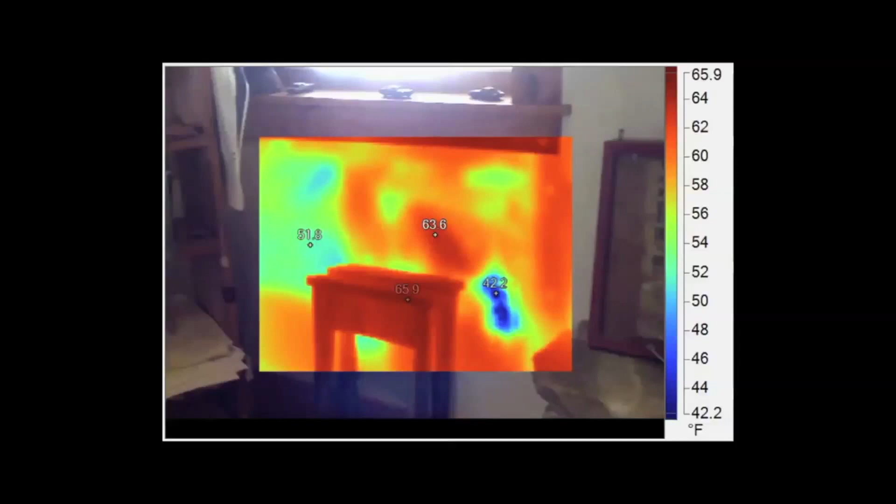So as people have mentioned earlier, you don't want to close off all pathways, because then the moisture levels will build up. And certainly balancing the air pressure becomes more and more important. But this really is a large overall strategy to be developed before one starts. Looking at areas where there is moisture, it's again important to know if there's something behind the problem. Is there flashing that's failed up above? And then coming up with a solution.

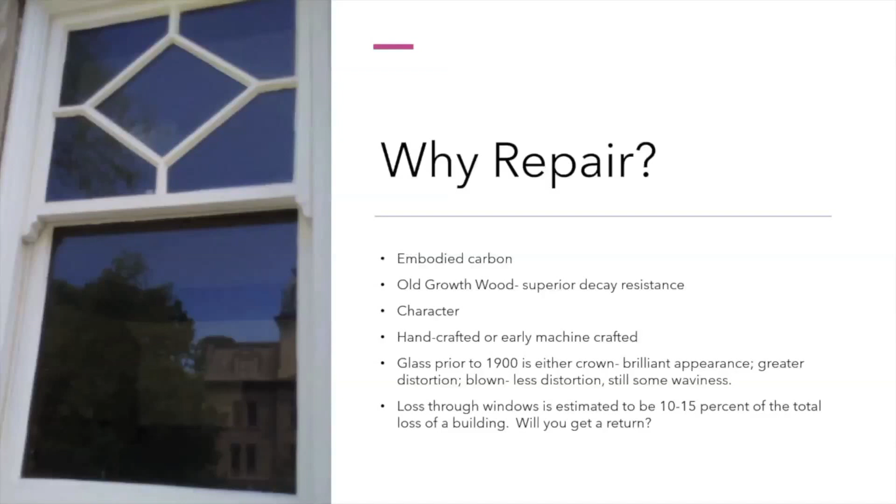Additional considerations about repair. A good resource is Preservation Brief number 9, written by the National Park Service. And it discusses 3 grades of repair, grades 1, 2, and 3. Grade 1 really addresses minimal repairs like redoing the putty, painting the window, just keeping it in good shape. A grade 2 is a selective replacement of elements, missing parts, missing glass. Again, not too much, but somewhat. And then the grade 3 is really the significant replacement of missing features, such as entire sections of the sash, the meeting rails, the stiles, and sistering in new wood in many, many instances.

It's important to note that whenever we work on historic windows that have paint on them and the painting was done prior to 1978 and maybe even a few years after, we need to be concerned about lead-based paint and always follow lead-safe work procedures when working on historic windows. And it's important to do testing to document what you're working on.

Another consideration gets back to the glass. If you are working with existing sash, some craftspeople have removed some of the building fabric and have been able to insert double or even triple glazing into the sash, and that can work, but you often do remove quite a bit of historic fabric, and it will have a change in the appearance of the building.

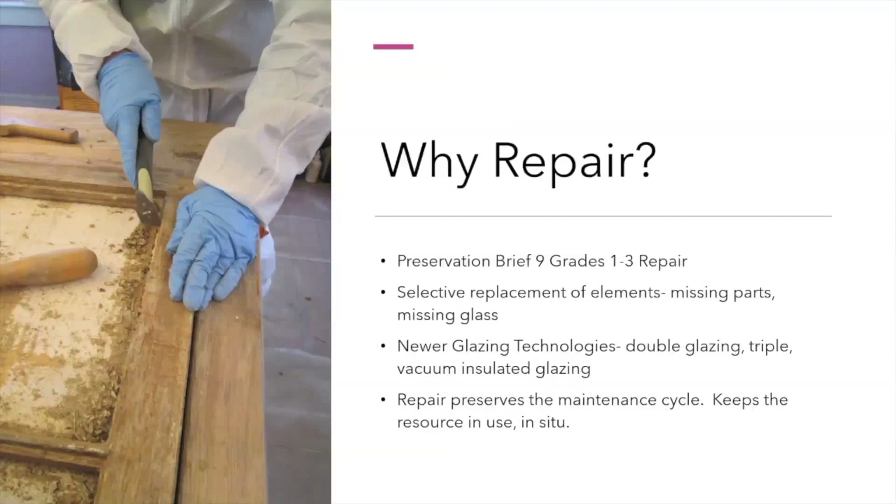The value of vacuum insulated glass is that it can also be manufactured to a thickness of 1/8 of an inch, and that is often very helpful when you're replacing glass in historic sash. It will work well within the existing historic sash. It's important to also remember that when we repair a window, we're preserving the maintenance cycle, and it keeps the resource in use in situ.

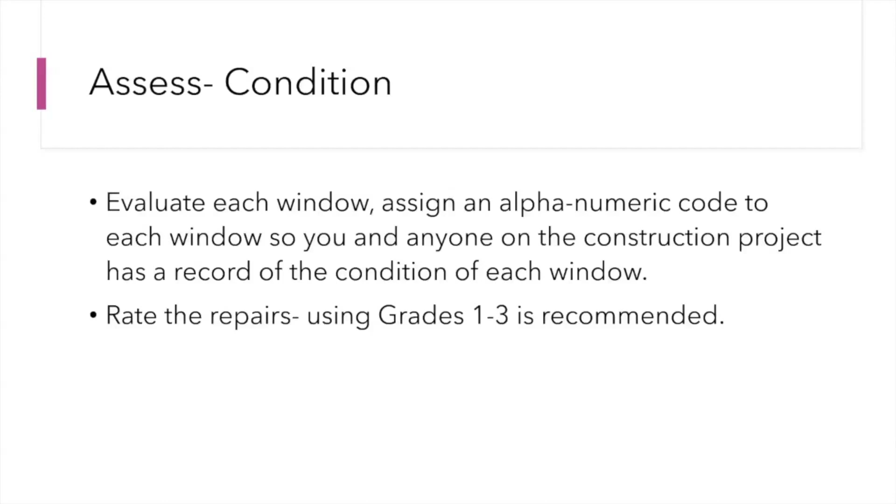In addition, you're going to assess the character, and some of the things you should look at include the original details and or significant changes in window design over time. Just like I showed you an example of 1922 windows in the church that dates from the 18th century. They're still significant, they're still important. Some of the things you're going to want to examine are the muntin profiles, the casings, the lintels, the sills, and the reflective qualities of the glass.

A good resource for helping you assess character is another National Park Service preservation brief. It's number 17, and it's great not only for windows, but for looking at the entire character of a building, both inside and out, and helping you make the decision about what is significant, what is important, what is worth preserving.

Well, while we always recommend repair as our first treatment preference, there are times when we're going to need to replace windows. The obvious time is when the windows are missing. And if that's the case, researching what the historic windows look like will help you match the historic configuration if possible. You may have to work with several different periods because there may have been more than one generation of windows. And again, you're going to want to consider the size of the window, the numbers of panes or lights of glass, muntin profiles, and shadow lines.

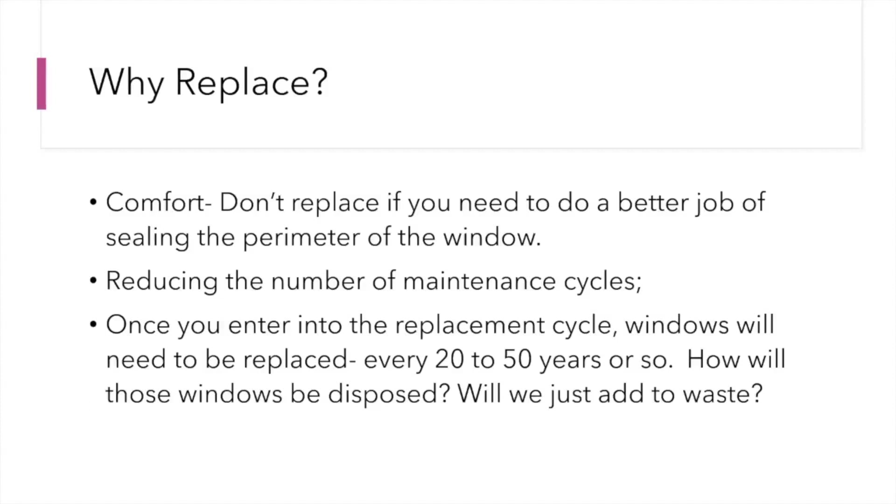But you must remember that once you enter into a replacement cycle, windows will need to be replaced, depending upon their warranties, depending on how they actually perform in situ. But you're probably looking at replacing every 20 to 50 years, maybe a little more, maybe less. But how will those windows be disposed of? And are we just adding to waste when we get into that replacement cycle?

Important questions to ask. If you're restoring a window, the thermal efficiency can be greatly improved with storm windows. An exterior storm does a great job of protecting the primary window. An interior storm is likely to give you better heat retention and, again, perhaps a better sense of comfort, but no protection for the exterior of the window.

Regardless of which system you use, be sure you have weep holes, because you need to allow vapor to move through the window. They've got to be able to breathe. And because of differences between inside temperature and outside temperature, condensation is going to be an issue, and the weep holes will help you manage that.

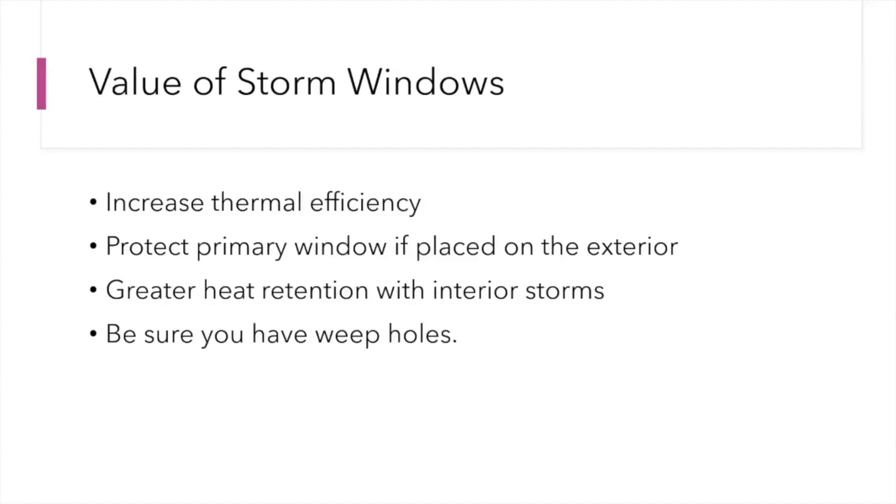Finally, while historians talk about architectural character and we all want to save energy, it's important to ask ourselves, how does science inform this discussion? Vermont was a pioneer in examining windows and the importance of storm windows as early as the 1990s. The Vermont Division for Historic Preservation worked with the Cold Regions Lab in Hanover, New Hampshire, and that's a program of the Army Corps of Engineers, and they developed a study with funding from the National Center for Preservation Technology and Training. You can still get that study today, and you just really need to update it with contemporary cost information. It's still really good, and it documented that windows that are restored with a storm window are competitive with replacement windows.

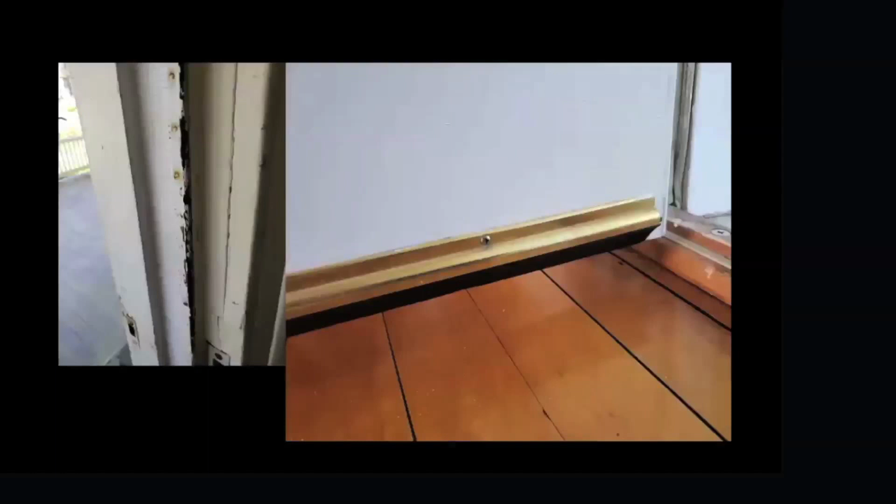Another quick fix is those letterbox holes that we see in door cores. Sometimes we can leave them in place and just add a little piece of foam and maybe some wood veneer on the interior, or they can be removed entirely with a Dutchman patch to fill it in if you're going to paint it. Again, similar to windows, weather stripping and door stops can do a great deal to increase the efficiency. We can move those stops in and out to form that tight seal to the door, and weather stripping down the threshold is, again, a cheap and easy fix.

I think we need to think about both doors and windows in that they were made to be efficient. They were made to really be airtight. So as you're looking at a window and the window stops on either side, some of them have little screws and buttons. Those were made to come in and out depending on the season: out in the summer so you can raise and close windows, and pushed in in the winter so that they form that tight seal against the sash. Window locks, yes, they're great for security, but they're also perfect for making sure those meeting rails between the two double hung sashes form that tight connection.

And there's a number of different types of weather stripping that I can't go into today that can really help form that tight seal between those windows. And then you're left with an interior or exterior storm. So before you jump on that replacement train, think about different steps that you can take with the existing windows to button them up. There are so many different ways to do it.

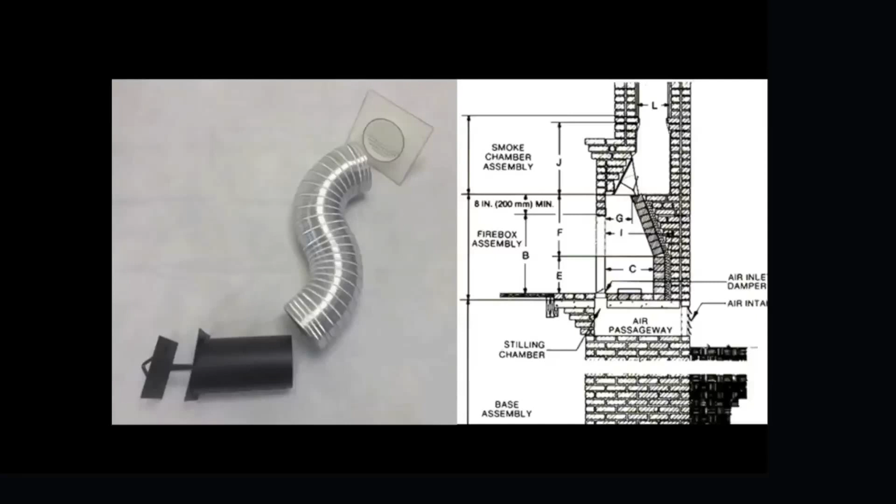Other areas that can be real problems: older exhaust fans, which could easily be replaced with a Panasonic and then put on a cycle. This is a Lunos, which I'm about to try in a new project. It's called the Ego, and it's actually, I don't know if it's an ERV or HRV, a through the wall unit that doubles as a bathroom fan.

So I guess this is going to be the next generation of actually capturing the heat as it leaves the moist air of a bathroom. Range hoods. This kitchen actually has a range hood, and you can't see it; it's hidden.

Most people don't mind seeing them, but the important issue is that they need air intake, a dedicated air intake, if at all possible, somewhere around the stove. Otherwise, you can design air intakes in other parts of the building.

I just realized I forgot a slide I wanted to show. There's something called a passive air inlet. It's a sleeve that you put in through the rim joist, usually into the basement. You undercut the basement door, and then the air can circulate up into the house. Panasonic makes those, other companies do too. So it's a one-way air inlet, and so that's completely fine.

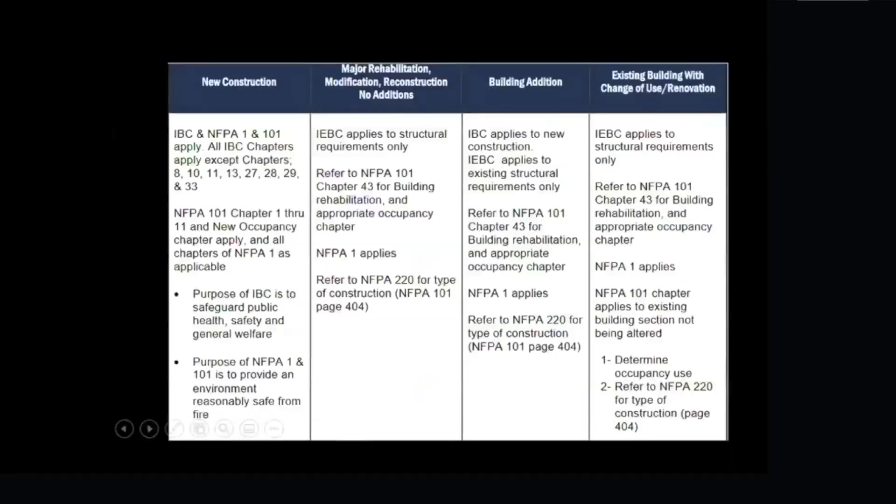This is an owner's apartment above a store, and it was a completely renovated project. And yes, one of the things that we didn't talk about so far with the decision about windows and doors is the hierarchy, that sometimes the street facing windows might be dealt with differently from the back. And that can give homeowners latitude for a couple things, meeting the energy code, but also saving money so that they have more budget available to do things like restore windows.

So the other gradation, if you will, is that typically things that are close to the ground, people can really look at carefully. So for instance, the state of Vermont prioritized repairing windows on a recent project along the street level, whereas the higher windows were allowed to be replaced. So for a couple reasons, also just the sheer necessity of having an egress window dictated that this building, which is in New York, had to change its operation from double hung to casement.